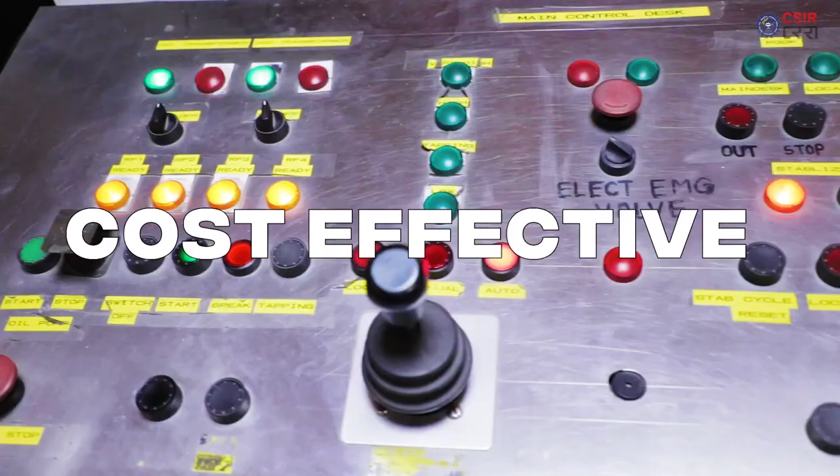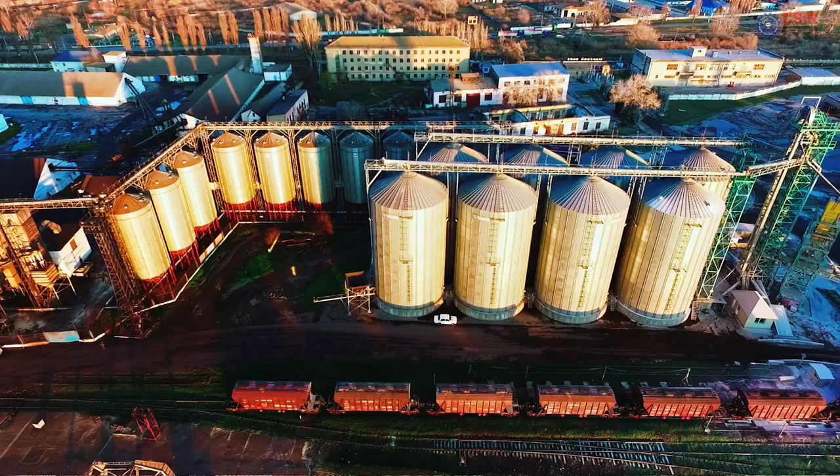Globalization has opened the doors of economic development for so many countries. There is a serious concern regarding how far we are being able to save the environment without hampering its constituents.

India holds the world's second largest road network in terms of length. Roads are considered the lifeline of the nation and an important prerequisite to accelerate economic growth. Roads serve as the lifeline of trade and economy. Besides that, under Government of India's ambitious road development programs such as Bharatmala and the National Highway Development Program, massive road development will be carried out in upcoming decades.

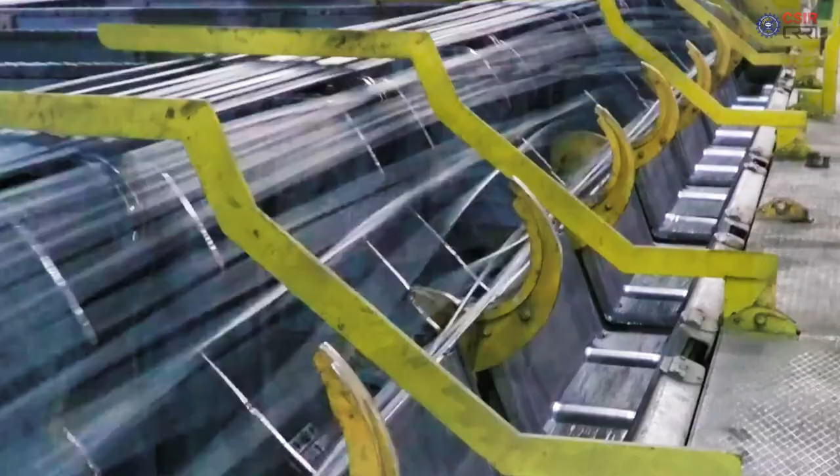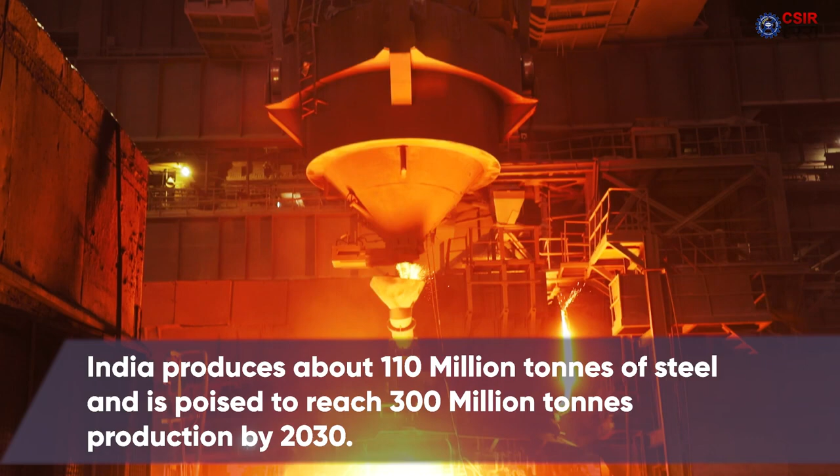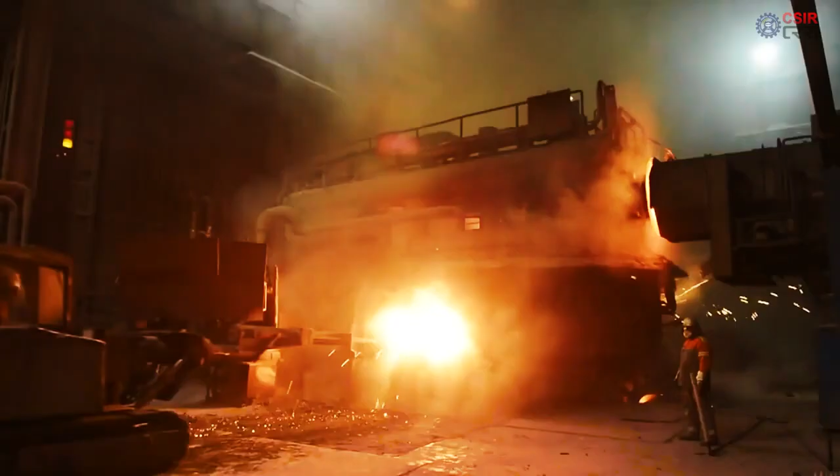Iron and steel industries are pillars of a country's economic and infrastructure development. India produces about 110 million tons of steel annually and is poised to achieve 300 million tons steel production by 2030. Along with steel, about 19 million tons of steel slag is generated every year during the refining process of steel from different steel plants situated across India.

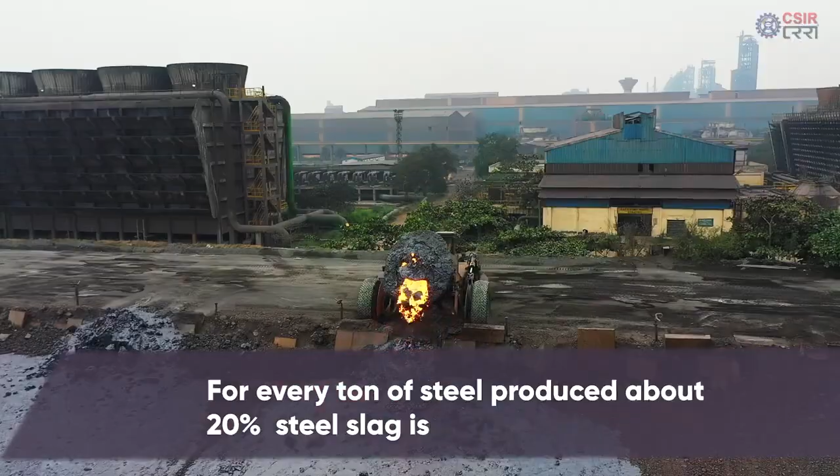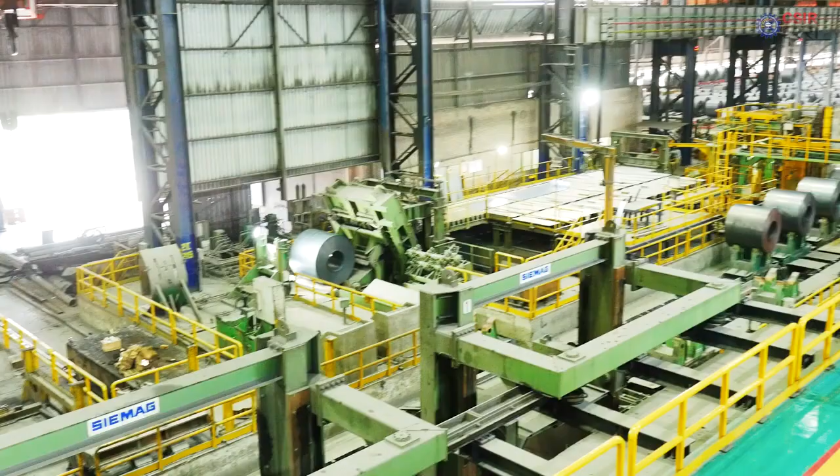For every ton of steel produced, about 20% steel slag is generated. Most of the slag is dumped in the nearby areas of steel plants, which becomes the source of water, air and land pollution. India is the second largest steel producer in the world, and presently 19 million tons of steel slag is generated in our industries. So that will be a big solid waste problem for the industries.

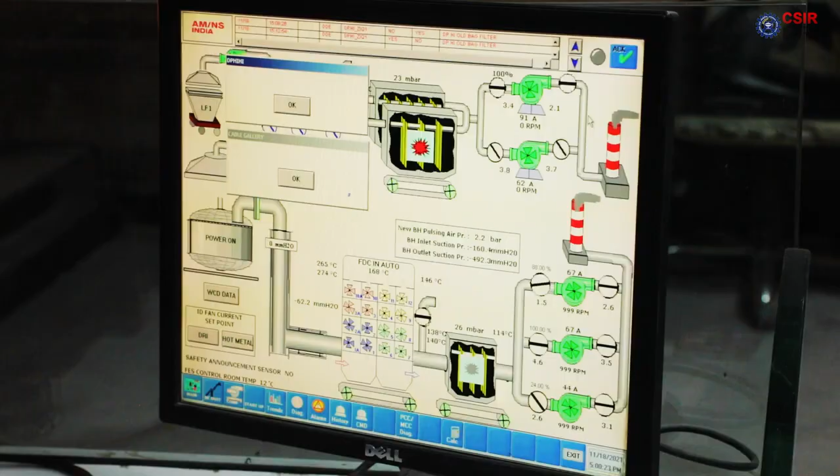Therefore, the Ministry of Steel, along with 4 steel industries, namely ArcelorMittal Nippon Steel, Tata Steel, JSW and Rashtriya Ispat Nigam Limited, have come forward and requested CRRI to develop technologies for them so that steel slag can be utilized in road construction.

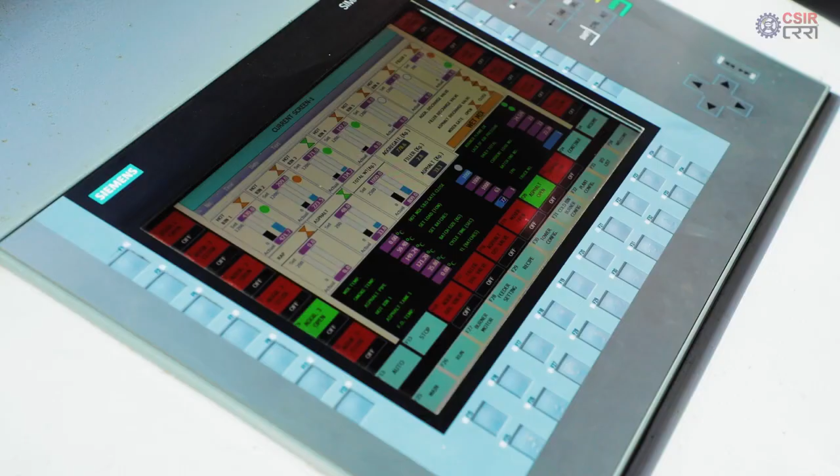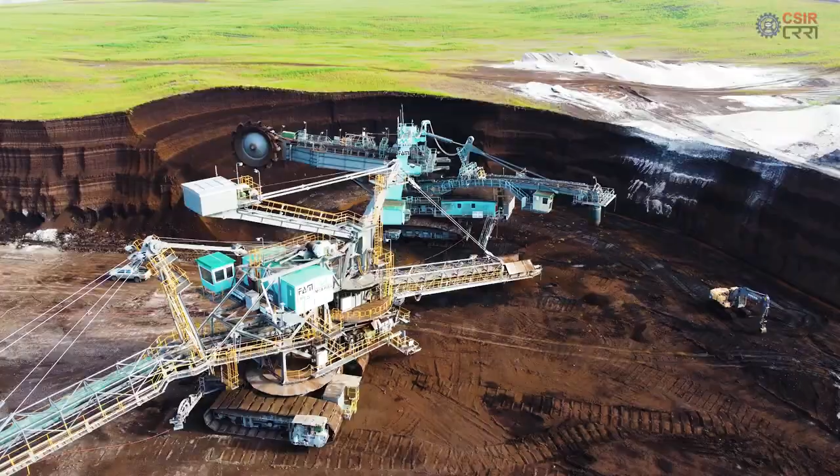Every year, multi-billion tons of natural aggregates are used in the construction and maintenance of the road network in the country. The idea of environmental conservation gains real momentum if we can conserve natural resources and use them in a manner that they are sufficiently available for the coming generations as well.

ArcelorMittal Nippon Steel India, under CSIR CRRI technological guidance and supervision, has shown that processed steel slag aggregates can be used for construction of durable roads, thereby providing a cost-effective and eco-friendly green alternative to conventional road construction materials.

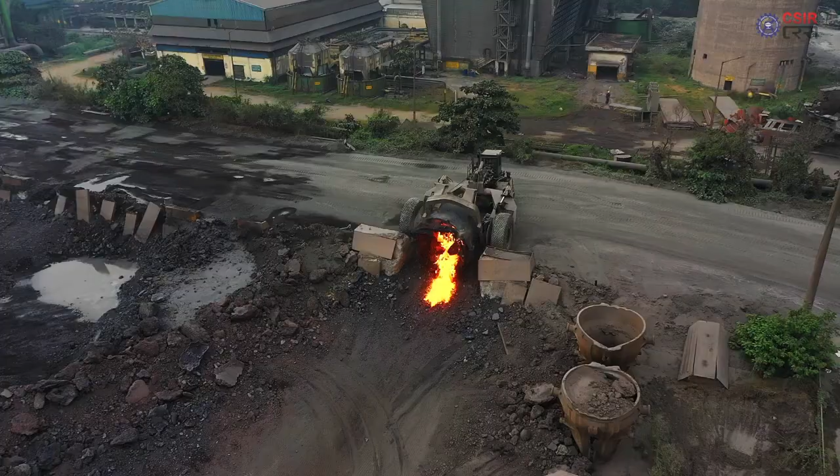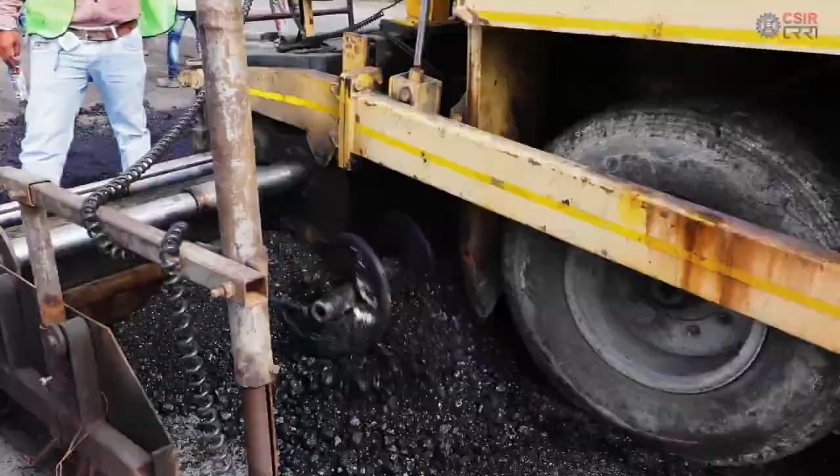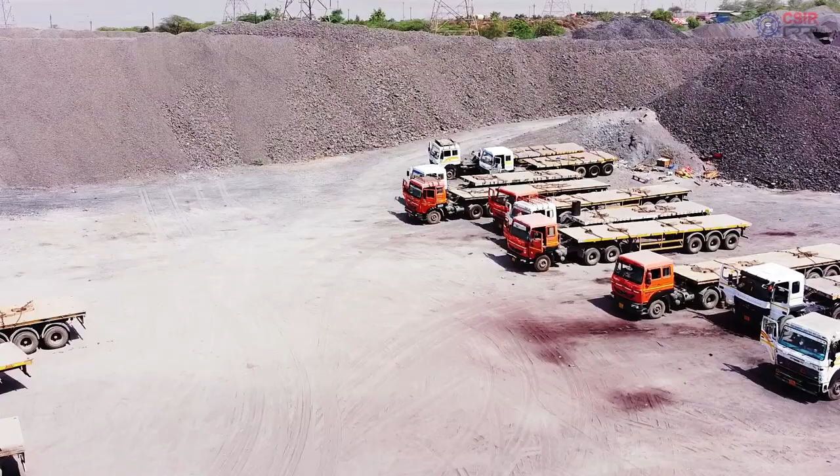Steel slag, which is rich in iron content, can become the source of good quality steel slag aggregates for potential utilization as a substitute for natural aggregates in road construction. Despite that, a large amount of steel slag generated from steel industries is disposed of in stockpiles today. As a result, a large area of land is being sacrificed for the disposal of this useful resource. The concept of sustainable development thereby comes into play.

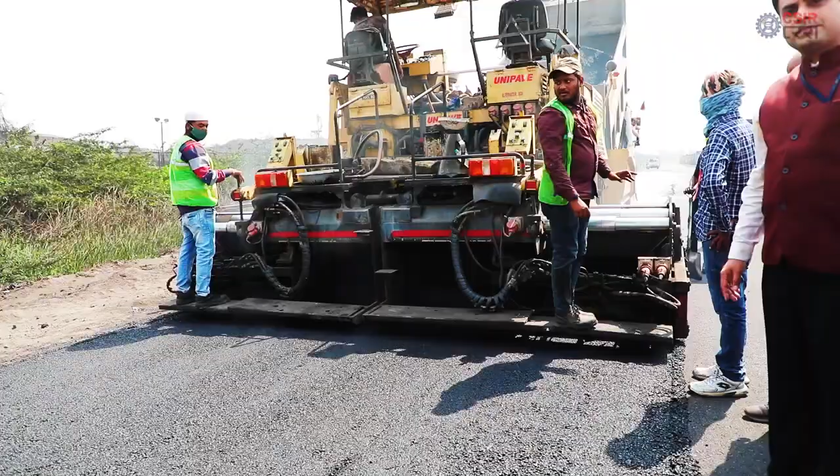Utilization of processed steel slag aggregate as a substitute for natural aggregates in road construction has shown quite promising results. Recently, CSIR Central Road Research Institute along with ArcelorMittal Nippon Steel India has constructed a 1 kilometer long 6-lane bituminous road at Hazira, Surat using processed steel slag aggregate.

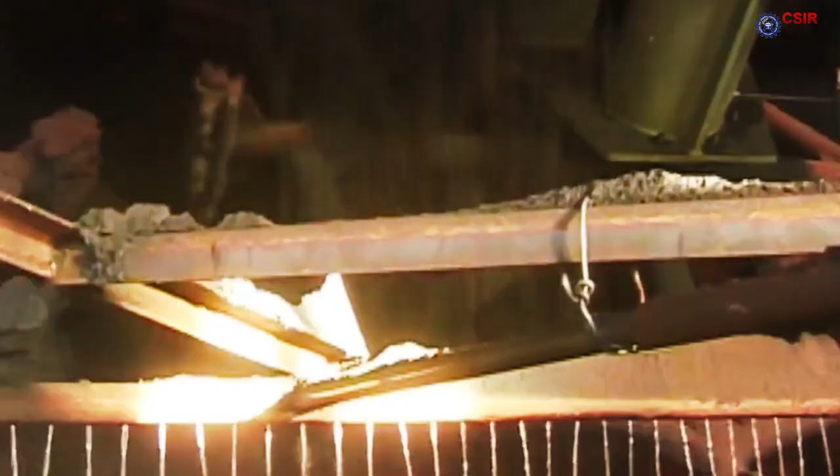Iron ore is sourced from mines and sent to steel plants for first making iron out of it. In the form of pellets, sinter or lumps, the ore is reduced in blast furnaces or DRI plants to form hot metal or sponge iron. This is a raw material for the steel making process.

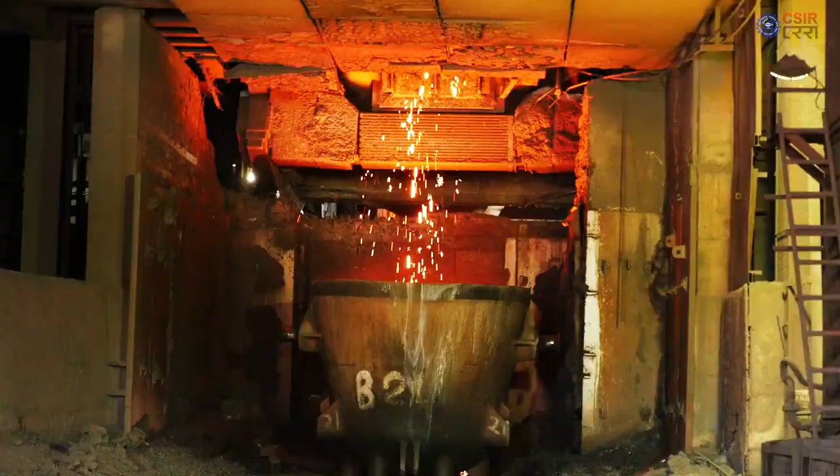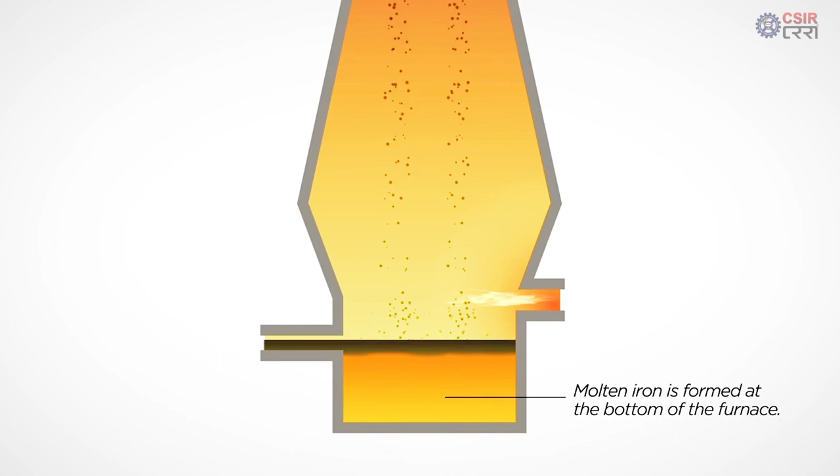During steel making, flux is added to catch the impurities present in iron during the primary refining process. The flux along with impurities forms a semi-molten mass called slag that floats on the liquid steel in the steel making furnace. Slag is a mixture of oxides formed predominantly by silica, alumina, calcium, magnesium and iron. The purified metal is taken out from the bottom and slag is taken out from the top of the furnace.

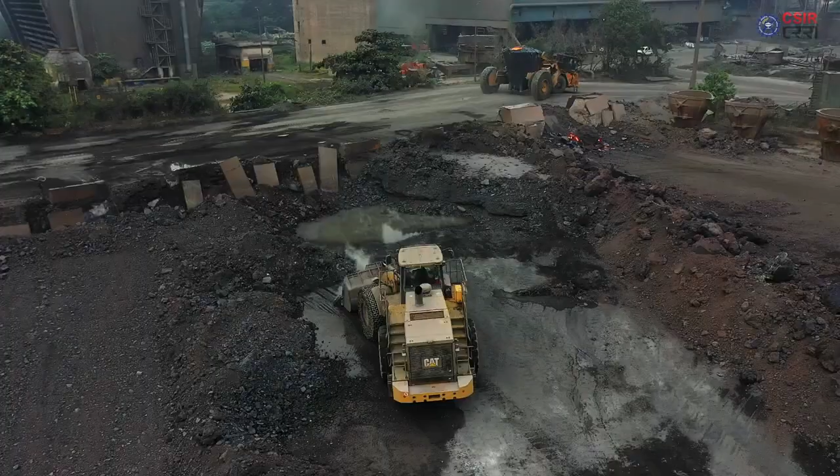The molten slag at 1500 to 1600 degrees temperature is poured into the slag pits for cooling. A customized cooling process is developed by CRRI to control and develop the microstructure of slag so that it works as stable aggregates. Once cooled, the slag is crushed into smaller sizes.

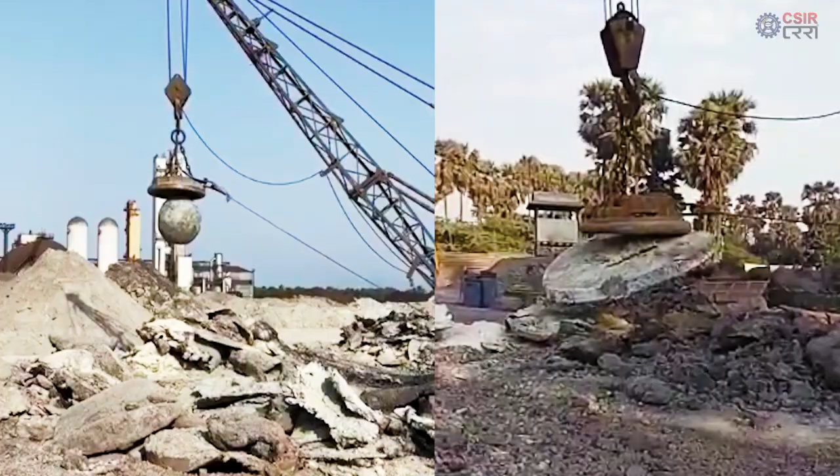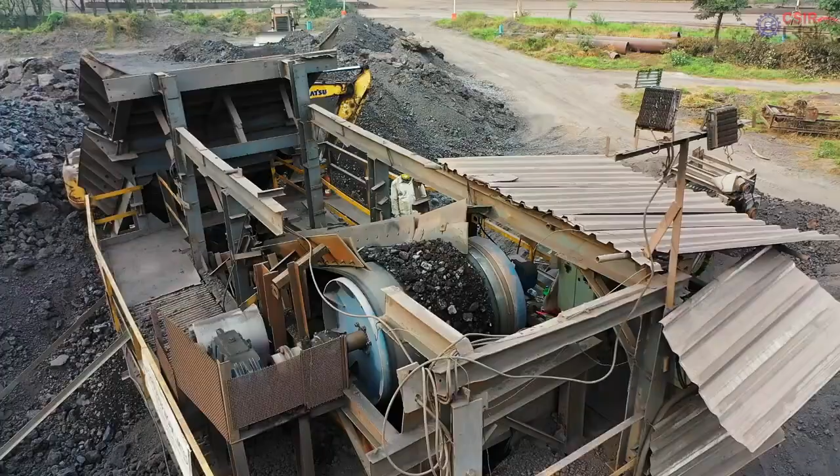Large chunks are broken by a balling crane where large steel balls are dropped on the slag boulders to break them down. The finer slag is then passed through a metal recovery unit where large magnets separate the entrapped metal pieces in the slag. The non-magnetic slag is then crushed and screened to various sizes based on application.

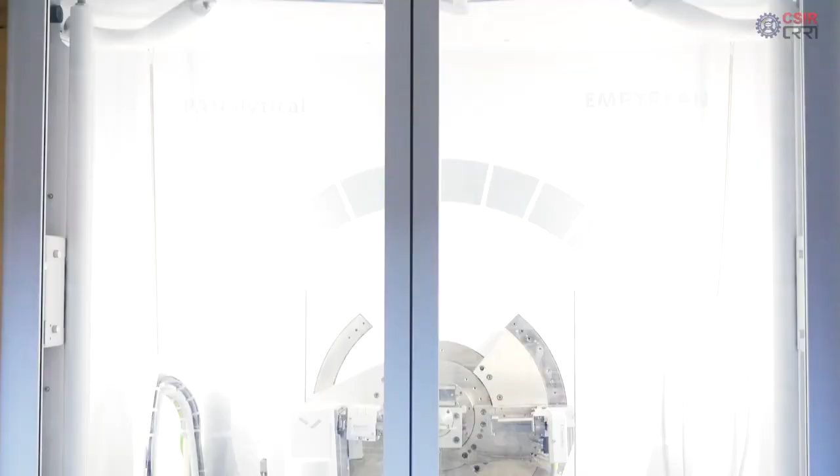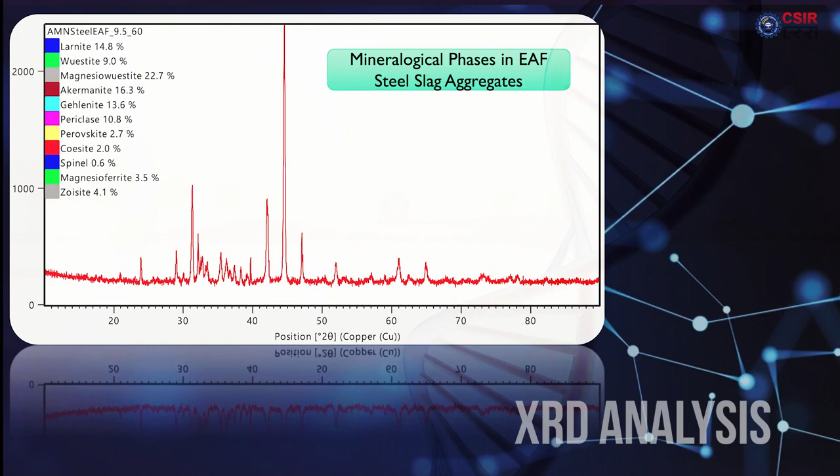Quality of the aggregate. X-ray diffraction analysis of processed steel slag aggregates is carried out for mineralogical phase identification and compositional analysis. Processed steel slag aggregates developed through the controlled cooling process show the crystalline phases found in good quality natural aggregates obtained from igneous rock groups.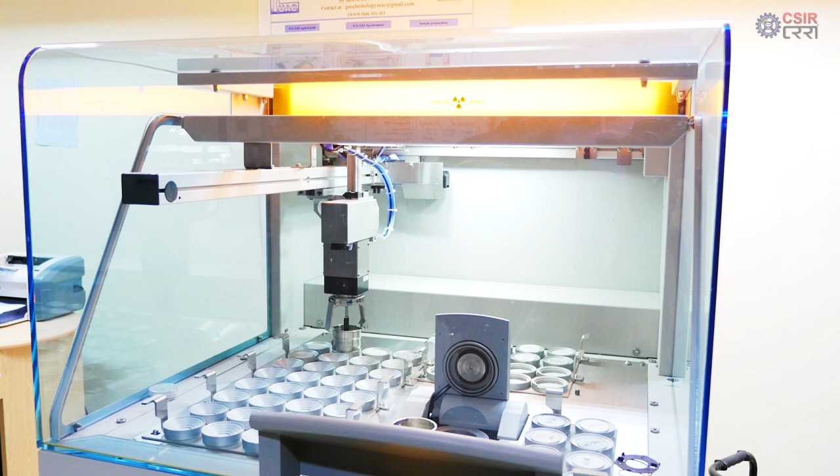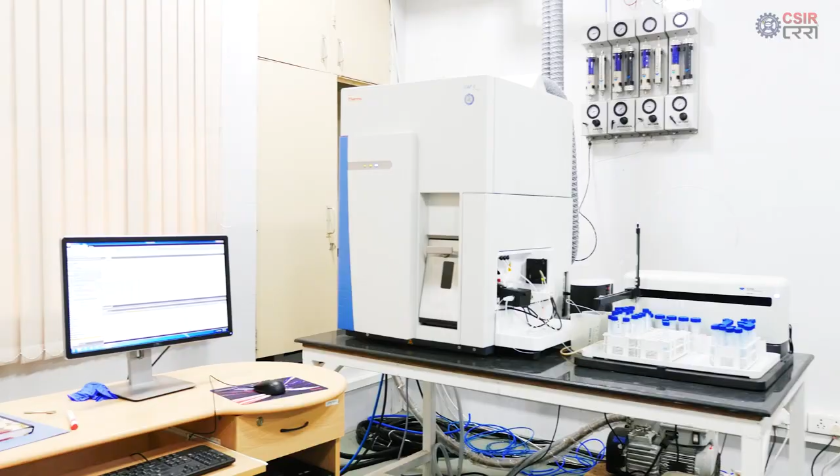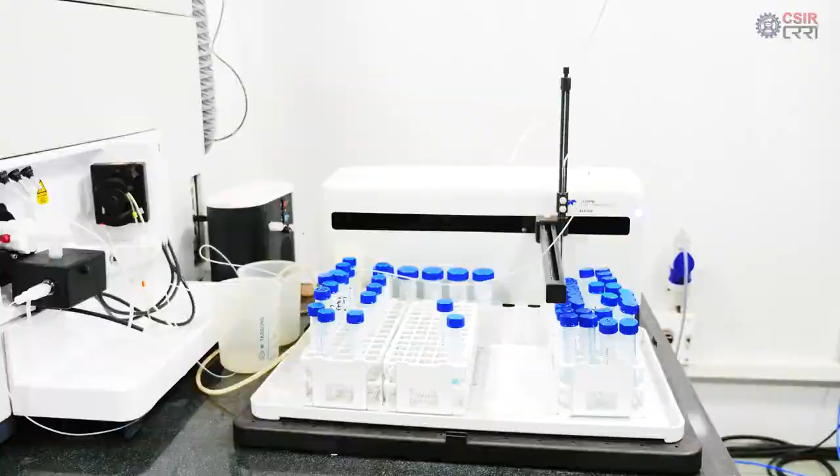Chemical composition of steel slag aggregates in oxide form is determined through a wavelength dispersive X-ray fluorescence spectrophotometer. Processed steel slag aggregates are also tested using inductively coupled plasma mass spectrometry to rule out the possibility of any heavy metal leaching under adverse environmental conditions. TCLP study conducted using the ICP-MS technique showed that processed steel slag aggregates are safe for various road applications.

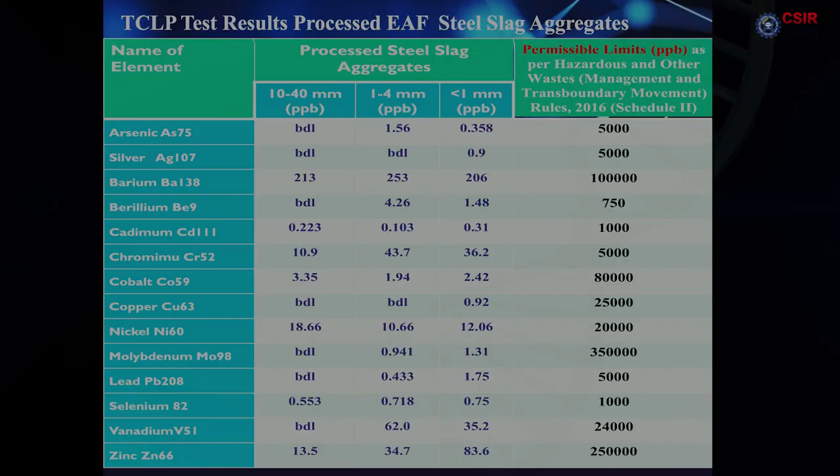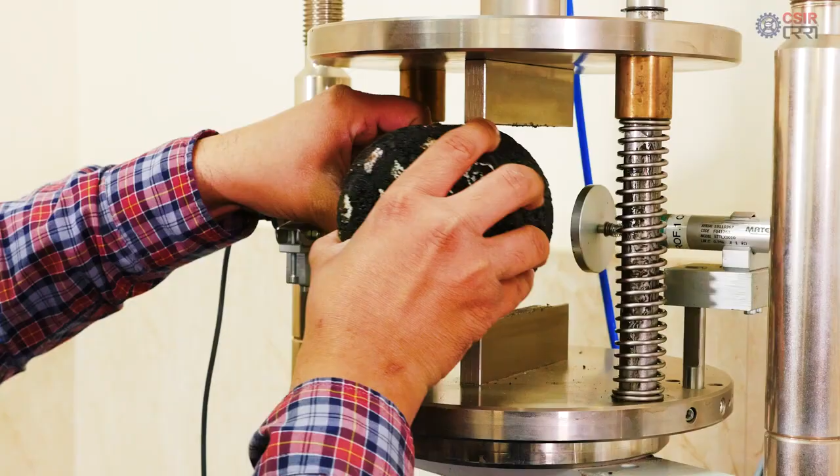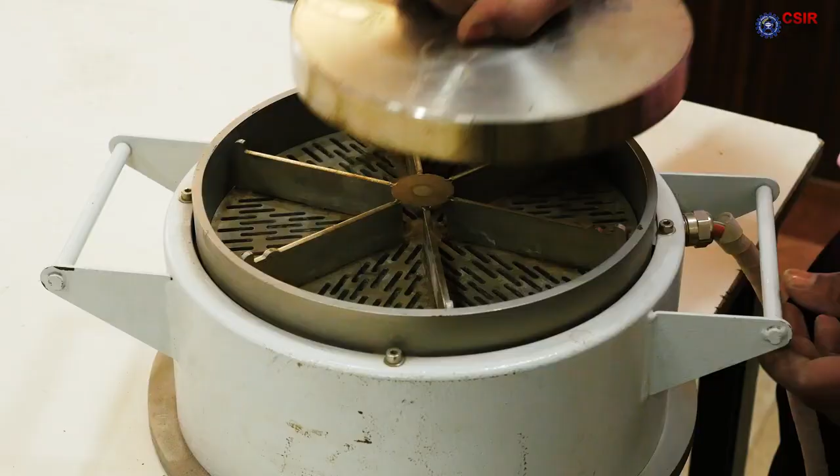Physical and mechanical characteristics of steel slag aggregates are established through a variety of tests to assess its suitability as road construction material. The CSIR Central Road Research Institute research laboratory used a world-class testing facility for aggregates testing. Its most important properties are grain size distribution, resistance to crushing, abrasion and polishing. The volumetric stability of the slag is also verified by an expansion test.

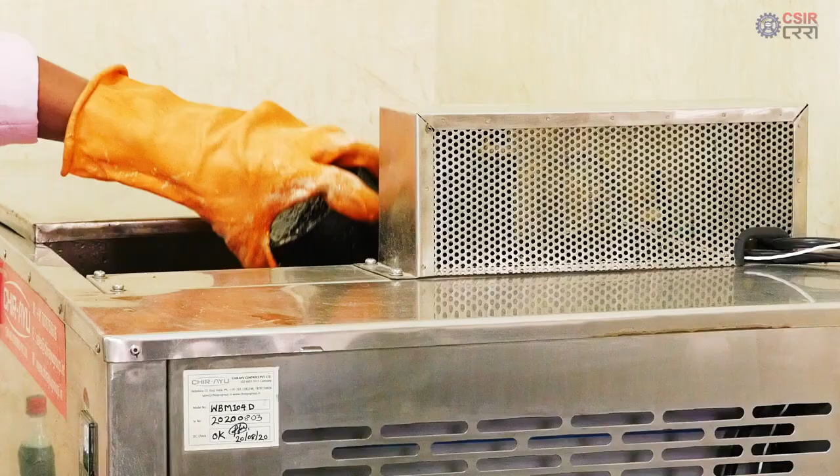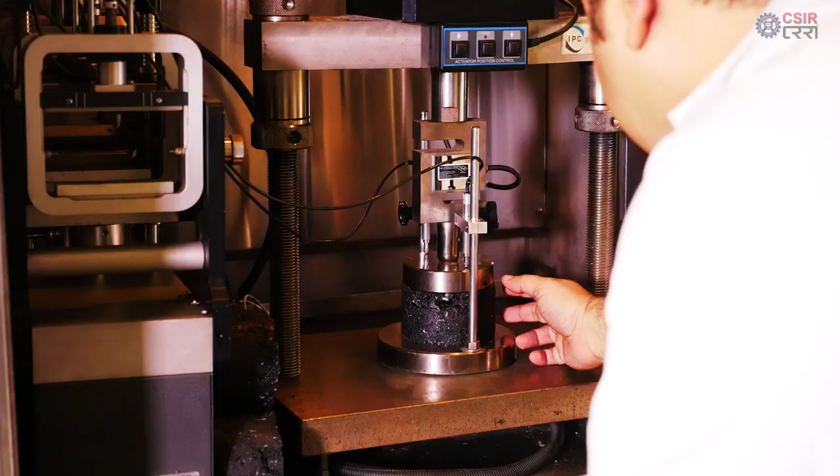Mechanical characterization of asphalt mixes prepared using processed steel slag aggregates is carried out through the state-of-the-art testing facility comprising Marshall stability, indirect tensile strength determination, and rutting resistance. Resilient modulus of steel slag asphalt mixes is also determined to design the steel slag road for different axle loads and traffic conditions.

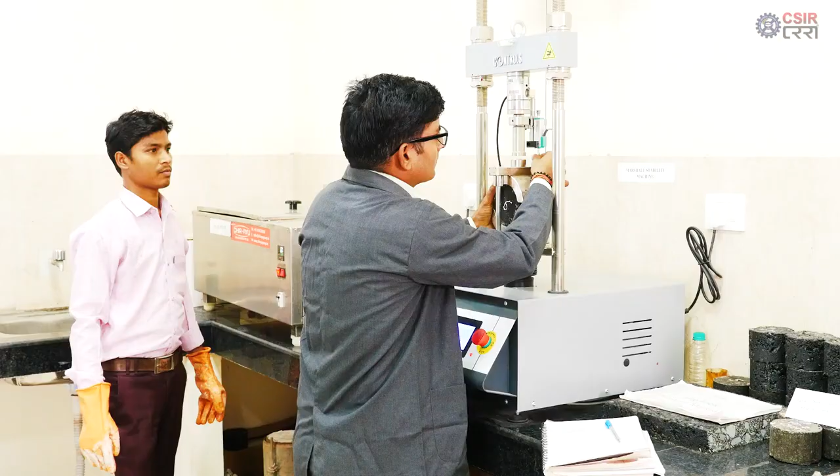Scientists at CRRI have investigated the use of steel slag as an aggregate for bituminous road construction. The best management option for this byproduct is its recycling as road-making aggregate. In India, Surat has become the first city in the country to get a processed steel slag road built as part of a joint venture project between CSIR Central Road Research Institute CRRI, Union Ministry of Steel, government think tank Niti Aayog and ArcelorMittal Nippon Steel India at Hazira, Gujarat.

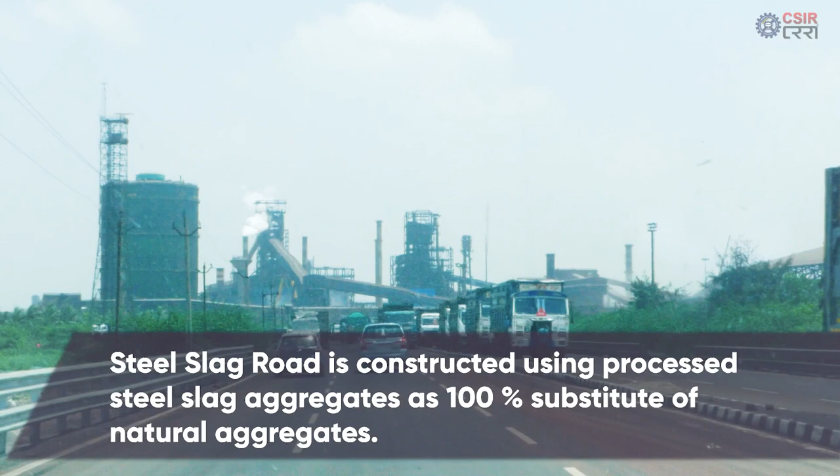Around 1 lakh ton processed steel slag aggregates has been utilized as a 100% substitute of natural aggregate and good earth for construction of this road. This road connects NH6 to Hazira port and is subjected to heavy commercial traffic. For the last 1 year, CSIR CRRI is monitoring its performance and we found that this steel slag road is meeting all serviceability parameters as specified for national highways in India.

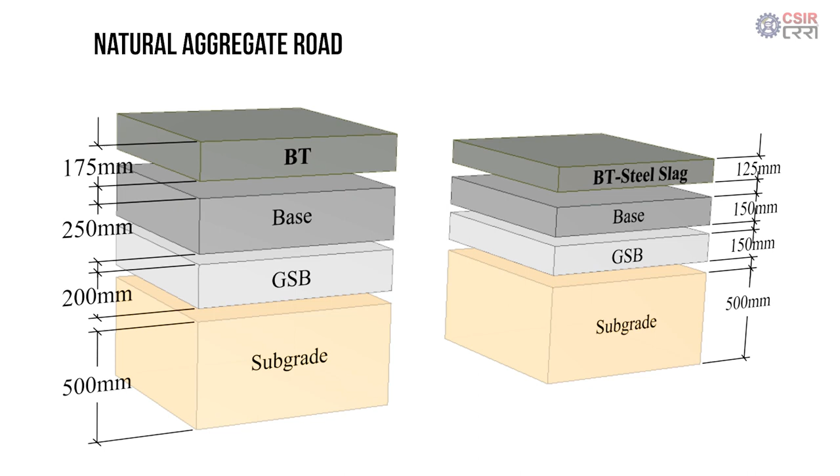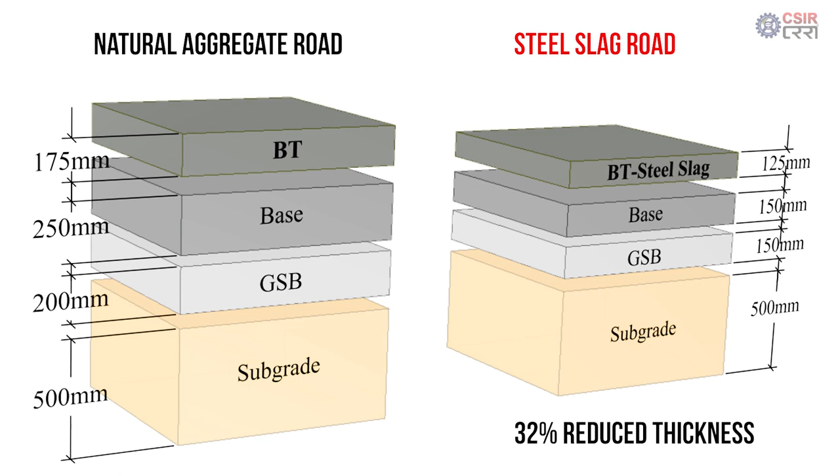Processed steel slag aggregates offer better mechanical load resistance, leading to reduction in thickness of various road layers. Steel slag road at Hazira is built with 32% reduced thickness for 100 MSA design traffic and 20 years design life period.

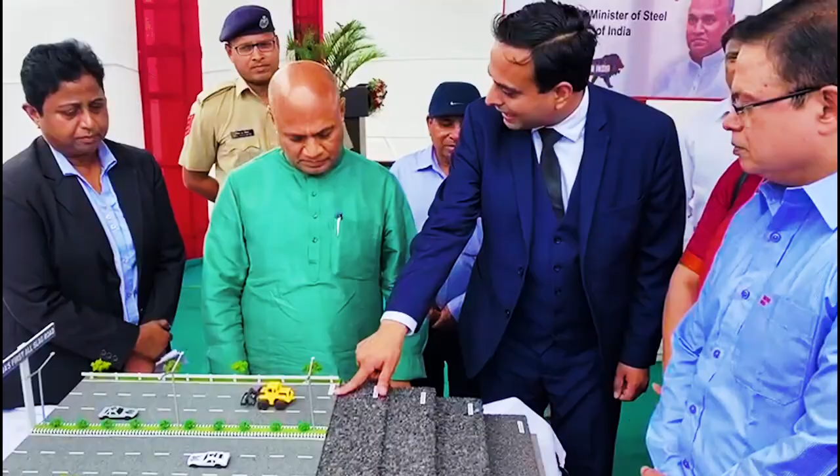And I believe that we must look at alternative forms of steel making, such as making steel from steel scrap, such as the example that we have seen of the 6-lane highway that was built with steel slag in Surat in Gujarat, the first of its kind in the world. And that happens only in India, made in India, ladies and gentlemen.

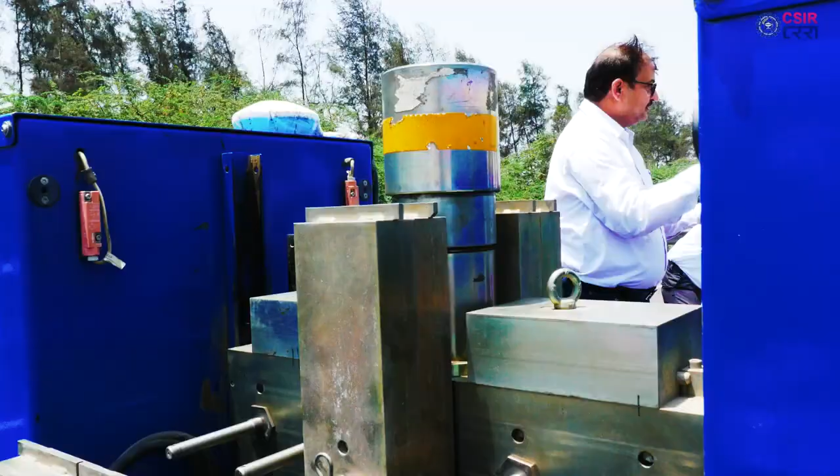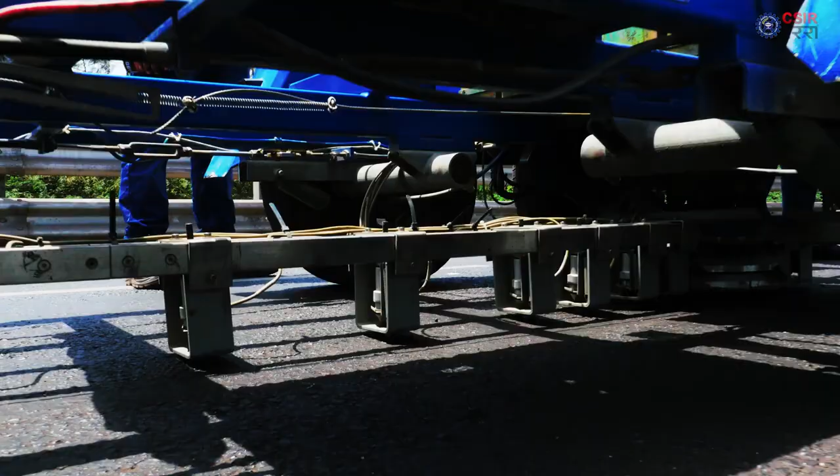Structural capacity of steel slag road is determined through heavy weight deflectometer test. Vertical surface deflection response of steel slag road under variable impulse loads is recorded through a set of geophones. Surface deflections in steel slag road under identical impulse loading conditions are found to be 60 to 70% less than the deflection observed in conventional bituminous road.

Temperature effect. Steel slag road is expected to have higher surface temperature during peak summer time. CSIR CRRI monitored the surface temperature of steel slag road and found that the surface temperature of steel slag road is equivalent to conventional bituminous road.

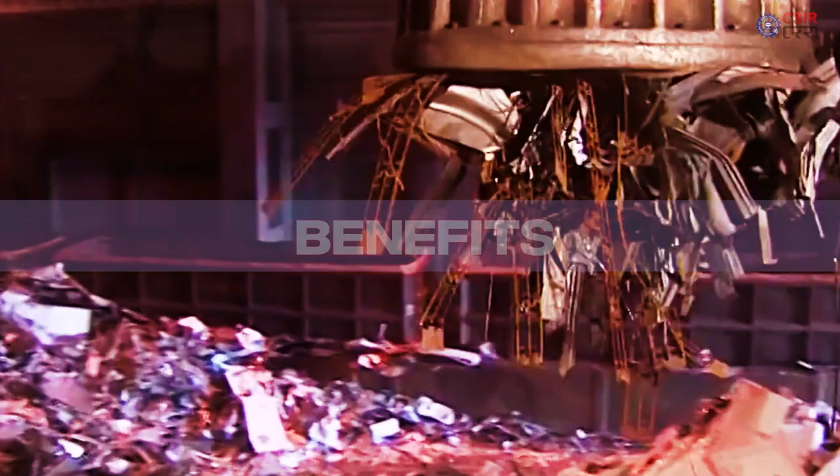Benefits. The utilization of waste steel slag for road construction reduces pollution created by heaps of waste dumped near steel plants. The particles of steel waste also get into the air and even seep into the ground, reaching the underground water table. For construction, maintenance and rehabilitation of road network, huge quantity of natural aggregates are required every year. This demand is met through the unsustainable quarrying of natural aggregates in many areas, leading to desertification and other serious ecological and environmental impacts.

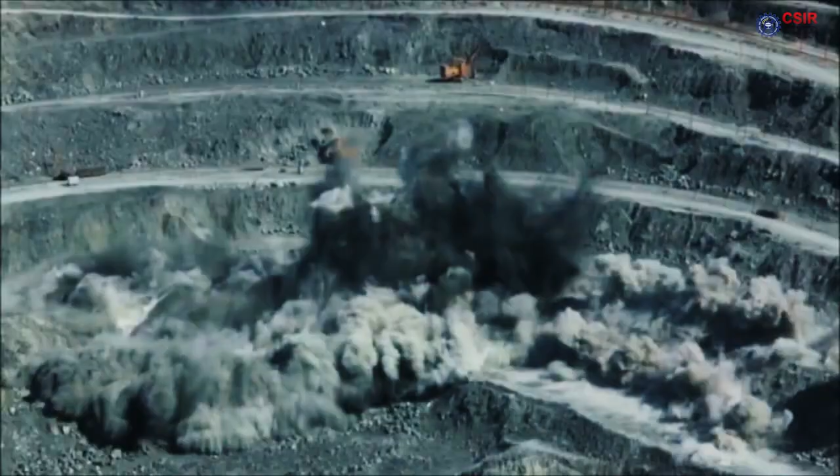I would like to congratulate CSIR CRRI for developing this innovative solution for utilization of processed steel slag in the construction of a steel slag road, which not only reduces the environmental impact of this waste material but also preserves our ecological system by meeting the partial requirement of the natural aggregates.

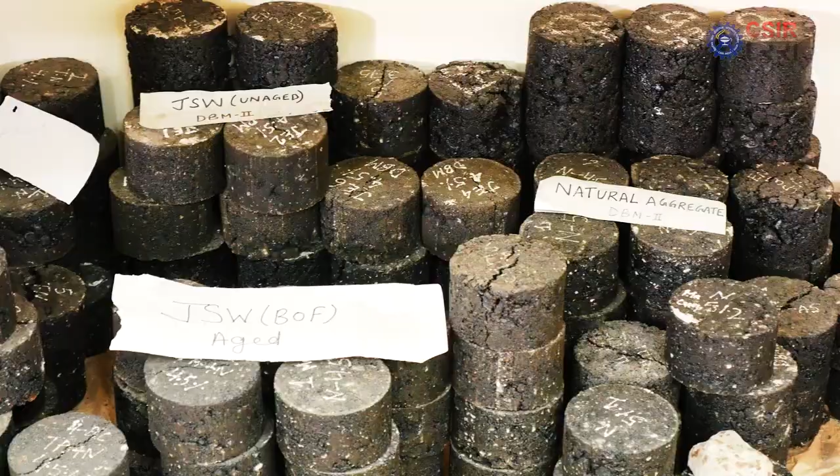The CRRI will now prepare guidelines and specifications for the utilization of steel slag in road construction. The parameters and performance indicators will be incorporated in the road guidelines and will be given to Indian Roads Congress, Ministry of Road Transport and Highways to utilize steel slag for the construction of national highways. I am very sure that in coming years, this steel slag aggregate technology is going to change the way roads are constructed in India, and the problem of waste material will also be sorted out.

Utilization of steel slag as substitute of natural aggregate in road construction is a green initiative under the Government of India flagship program Clean India Mission and Waste to Wealth. Research has shown the possibility of using steel slag in road infrastructures in order to promote the objectives set out by the Sustainable Development Goals to promote the circular economy and sustainable infrastructure.

CSIR CRRI's innovative first steel slag road in Surat, Hazira has further motivated our vision for a greener India, for a sustainable India, for a rising India. Steel Slag Road. A sustainable green utilization of steel slag in road construction.